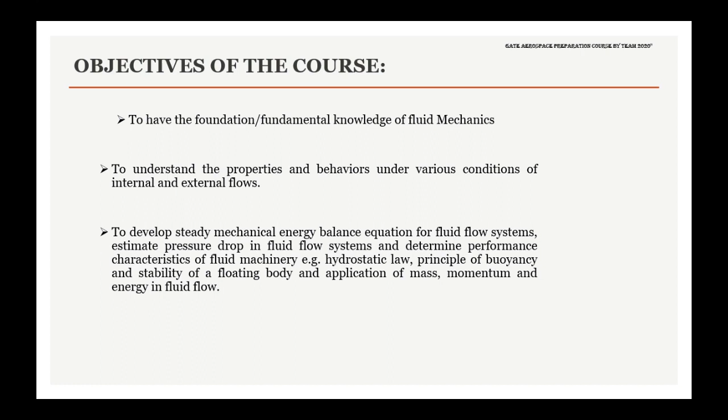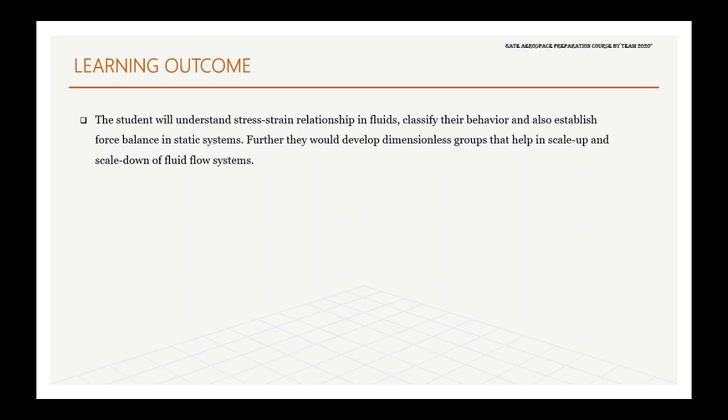There are more objectives that you can derive from this course. Let's look at the learning outcome. What is going to be the learning outcome after you have studied this course? Number one, the student will be able to understand the stress-strain relationship in fluids and classify their behavior.

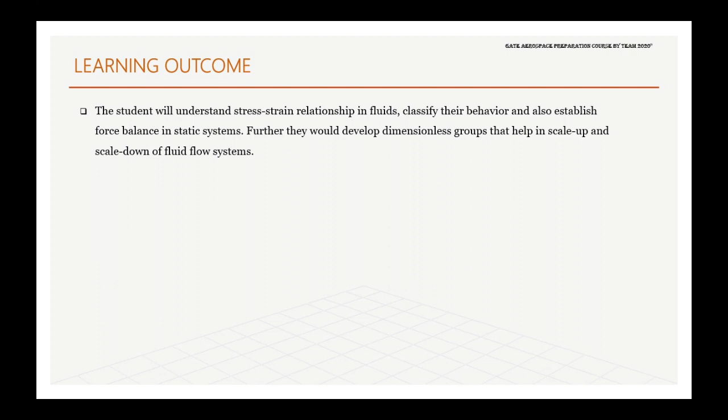They will also establish force balance in static systems. Further, they would develop dimensionless groups that help in scale-up and scale-down of fluid flow systems. That is learning outcome number one.

Learning outcome number two is that students will be able to apply Bernoulli's principle and compute pressure drop in flow systems of different configurations. You will be able to compute and understand the application of Bernoulli's principle.

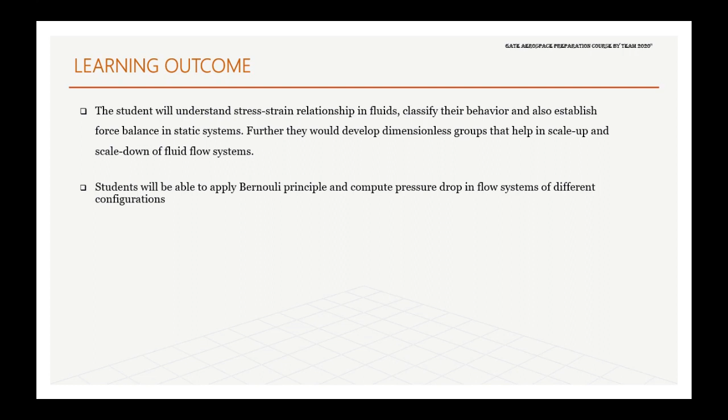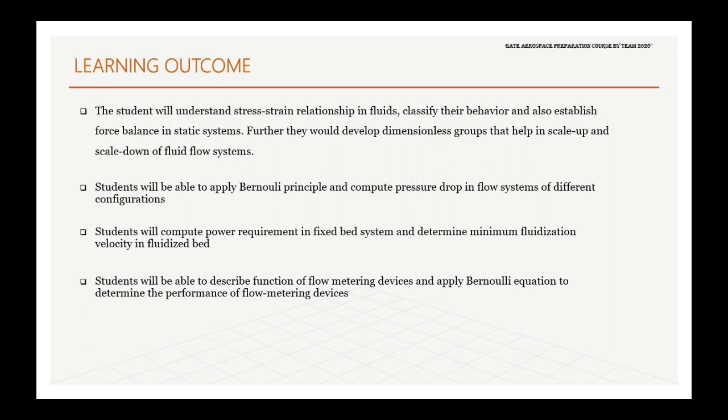Number three, students will compute power requirements in fixed bed systems and determine minimum fluidization velocity in a fluidized bed. Students should also be able to describe the function of flow metering devices and apply Bernoulli's equation to determine the performance of flow metering devices.

Last but not least, students should be able to determine and analyze the performance aspects of fluid machinery, specifically for centrifugal pumps and reciprocating pumps. Those are the learning outcomes, among others, which you can derive from this course.

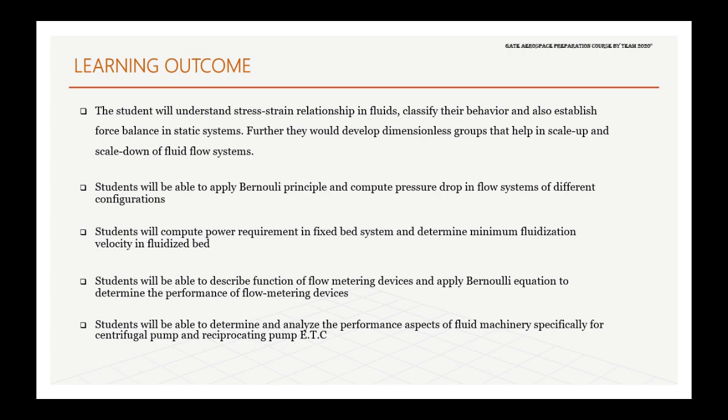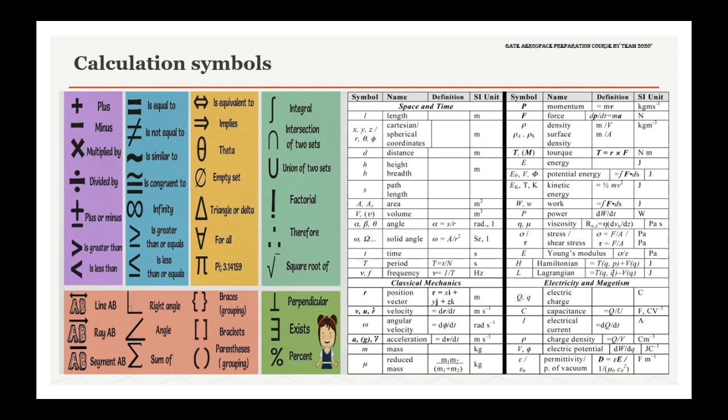Thank you very much. Now we want to look into definitions. Let us look at the definitions of fluid. That is where we want to start from. The topic says basic fluid mechanics. What are the basics, the foundations? That is the fundamentals. That is what we want to look into - the fundamental fluid mechanics. How does it revolve? That is what we want to look into.

Definition number one: a fluid is a substance that deforms continuously in the face of tangential or shear stress, irrespective of the magnitude of shear stress. This continuous deformation under the application of shear stress constitutes a flow.

The deformation - a fluid is a substance that deforms continuously. It is a substance, and it can deform continuously. That means it has a liquidation aspect to it. It can change its form. It can deform in the face of tangential or shear stress that has been applied to it. That is what a fluid is.

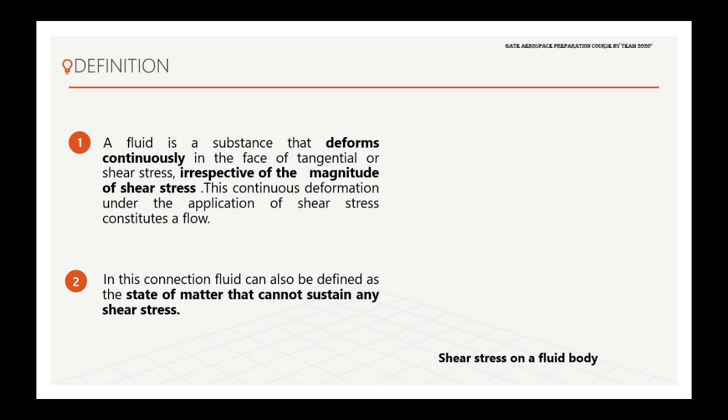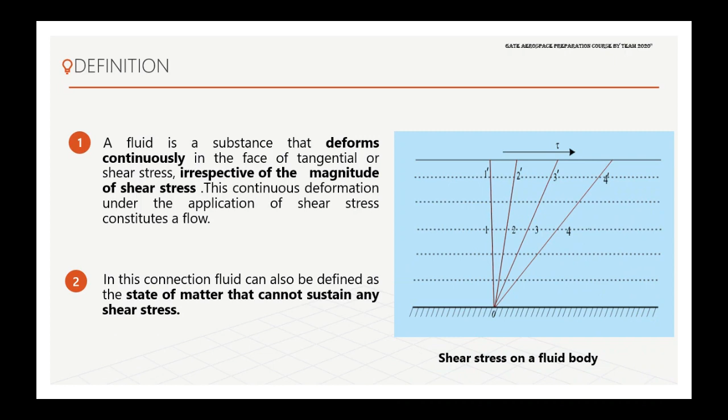If a shear stress is applied at any location in a fluid, the element 011, which is on the image I showed to you, initially at rest, will move to 022, then to 033, further it moves to 044, and continues to move in a similar fashion. That is, when stress is applied to a fluid, it moves within time - within seconds, within minutes. It moves, and then you see that the shear stress has been applied to the fluid, and it deformed.

In other words, the tangential stress in a fluid body depends on the velocity of deformation and vanishes as this velocity approaches zero. A good example is Newton's parallel plate experiment, where dependence of shear force on the velocity of deformation was established. So the tangential stress in a fluid body depends on the velocity of deformation, and as velocity approaches zero, there will be a vanishing within the fluid. We are going to see this in more explanation as we go further.

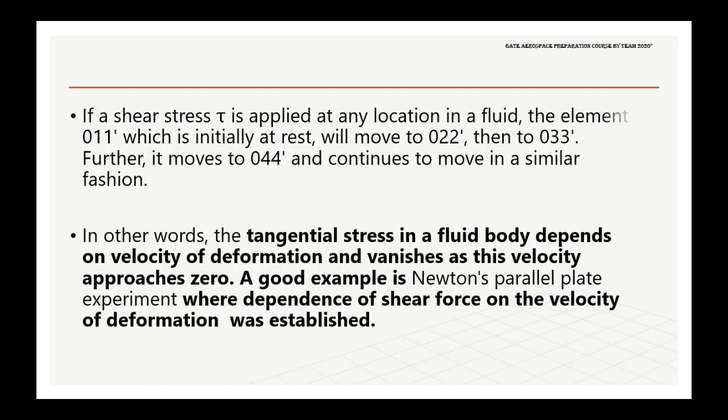Now let us look at the distinction between solid and fluid, because someone might say, is fluid and solid not the same? No, they are not the same. Solid is different from fluid. What is in solid that you can't find in fluid, or what are the distinctions between the two that we have just mentioned?

In solid, there is a more compact structure - when something is solid, you will find more compact structure. But in fluid, there is a less compact structure; fluid takes the shape of the container you drop it in. The attractive forces between the molecules inside solid are larger, therefore more closely packed. But in fluid, attractive forces between the molecules are smaller, therefore more loosely packed. That is why fluid and solid are not the same.

Number three: solids can resist tangential stresses in static conditions, but fluid cannot resist tangential stresses in static conditions. No, fluid cannot withstand that.

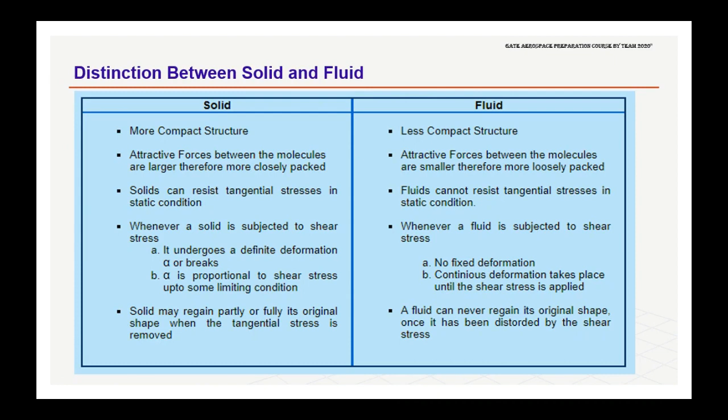So the distinctions between solid and fluid are many that we can mention, but these are just a few that we can bring up in this theory class. Now let's move further. We want to look at basic fluid mechanics and potential flow theory.

Basic fluid mechanics conservation laws are: mass, momentum, integral and differential form. Then the next topic is potential flow theory. Potential flow theory is different from basic fluid mechanics, but they go hand in hand. In potential flow theory, we will be having sources, sinks, doublets, line vortex, and their superposition, like viscosity, Reynolds number, and so on.

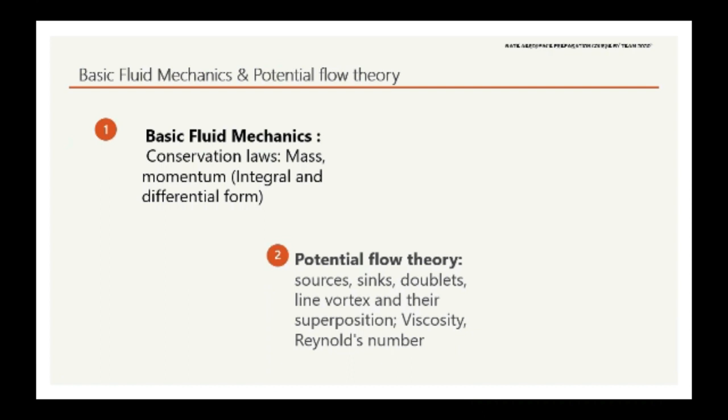Now let us look at basic fluid mechanics, conservation law, also called law of conservation. In physics, several principles state that certain physical properties, that is measurable quantities, do not change in the course of time within an isolated physical system.

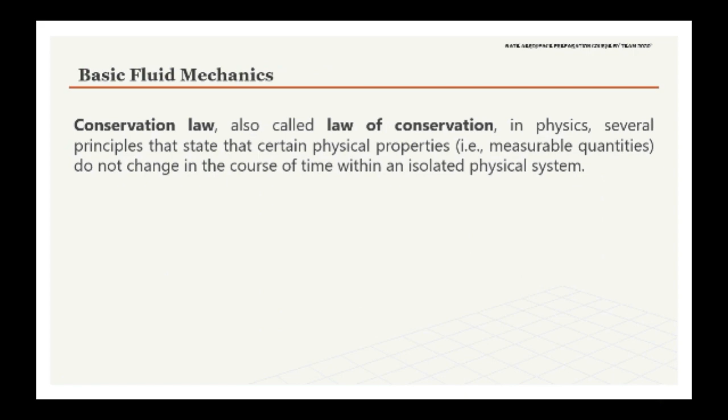What does it mean? In classical physics, laws of this type govern energy, momentum, angular momentum, mass, and electric charge. In particle physics, other conservation laws apply to properties of subatomic particles that are invariant during interactions. An important function of conservation laws is that they make it possible to predict the macroscopic behavior of a system without having to consider the microscopic details of the cause of a physical process or chemical reaction.

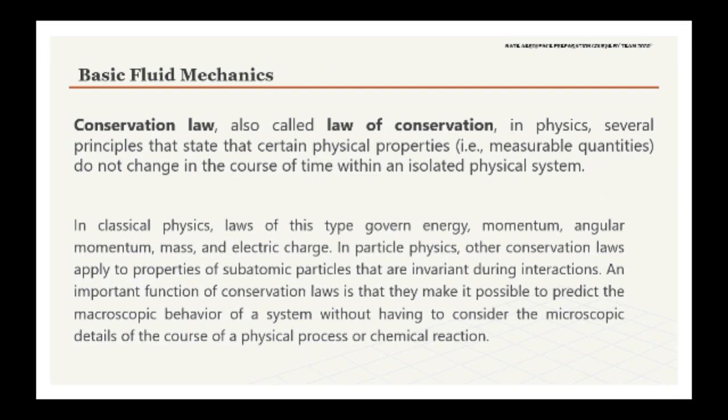In this basic fluid mechanics, we are going to see some little things that happen within some bodies that we might not take note of until we are in a class like this, before we begin to notice how the process begins. So let us look at conservation of mass.

Conservation of mass implies that matter can neither be created nor destroyed. That is, processes that change the physical or chemical properties of a substance within an isolated system, such as conversion of liquid to gas, mean changing or converting from liquid to a different state.

Example: you can put water in a plastic container and put it in a freezer. You are making a conversion of the fluid body, but it will come out in the form of solid. The system leaves the total mass unchanged. Strictly speaking, mass is not a conserved quantity; however, except in nuclear reactions, the conversion of rest mass into other forms of mass-energy is so small that, to a high degree of precision, rest mass may be thought of as conserved.

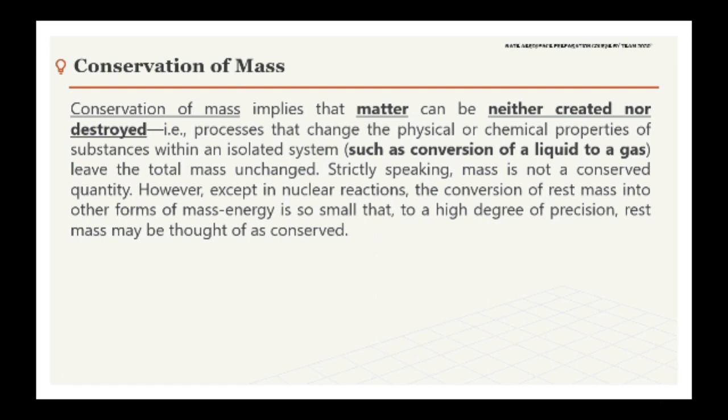But liquid is not rigid, liquid has no fixed shape, but it has a fixed volume. When it comes to gas, gas is not rigid, gas has no fixed shape, and gas has no fixed volume, because it can disappear into thin air.

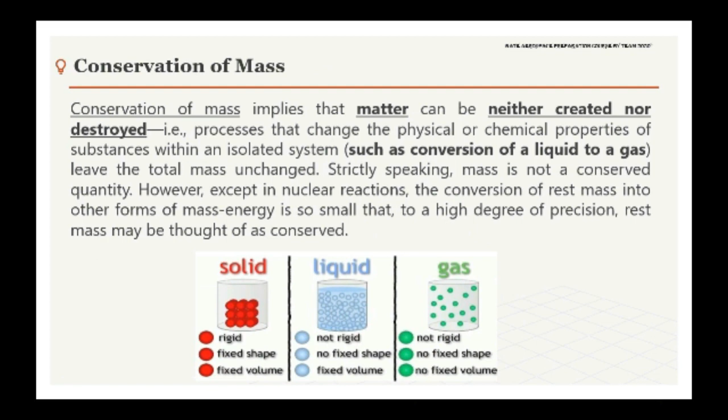Gas is not rigid, it has no fixed shape, and it has no fixed volume. But liquid has a fixed volume, though no fixed shape. Solid has fixed shape and also fixed volume. Let's go to the next slide.

Now, conservation of momentum. We have looked at conservation of mass; now we want to look at conservation of momentum. This is a general law of physics, according to which the quantity called momentum that characterizes motion never changes in an isolated collection of objects. That is, the total momentum of a system remains constant.

Momentum is equal to the mass of an object multiplied by its velocity, and is equivalent to the force required to bring the object to a stop in a unit length of time. For any array of several objects, the total momentum is the sum of the individual momenta. There is a peculiarity, however, in that momentum is a vector involving both direction and magnitude of motion, so that momenta of objects going in opposite directions can cancel to yield an overall sum of zero.

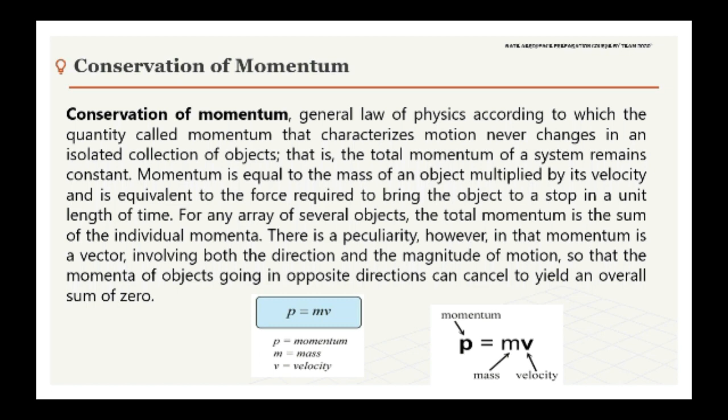So let's go into conservation law, integral and differential form. In most engineering applications, the physical system is governed by a set of conservation laws. For example, the governing equations in gas dynamics correspond to the conservation of mass, momentum, and energy. These conservation laws are often written in integral form for a fixed physical domain.

Where U is the conserved state, F is the flux of the conserved state, N is the outward pointing unit normal on the boundary of the domain, and S is a source term.

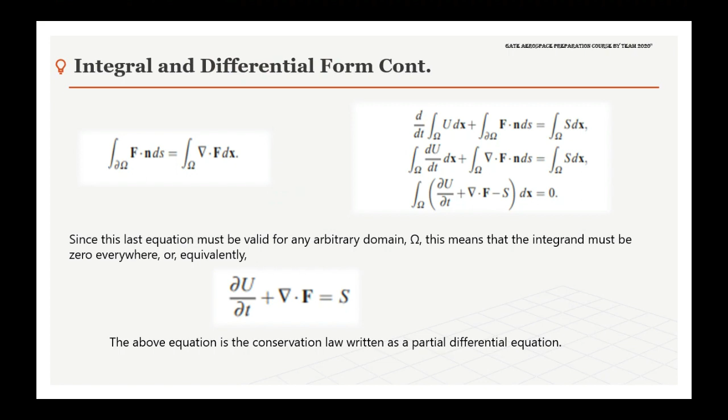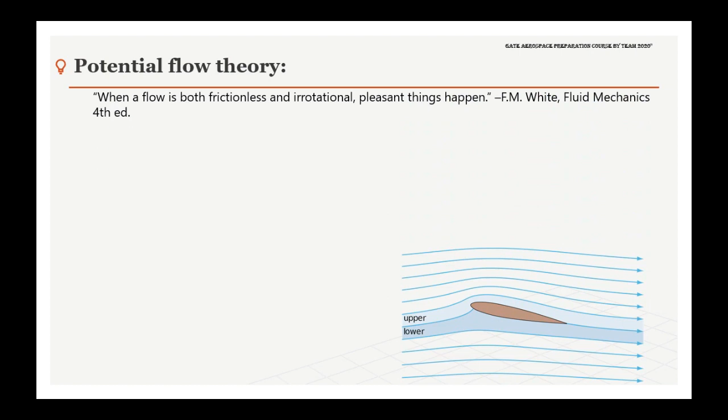Now let us look at potential flow. When a flow is both frictionless and irrotational, pleasant things happen. This quote was made by F.M. White, who was a first-grade fluid mechanics educator.

We can treat external flows around bodies as inviscid, that is frictionless, and irrotational, meaning the fluid particles are not rotating. So when you hear the word frictionless, it means inviscid, and irrotational means the fluid particles are not rotating. This is because viscous effects are limited to a thin layer next to the body.

Next to the body, this thin layer is called the boundary layer. Let me give an example to explain this.

When you put your two hands together and rub them, remember your palm has a layer, and the layers of the two hands come together, which is called the boundary of the two hands. When you rub them together, that is when friction or shear stress is applied, and you sense that while rubbing them in a straight motion. Both hands have what we call boundaries, the layers of your palm. That is what is meant by the boundary layer.

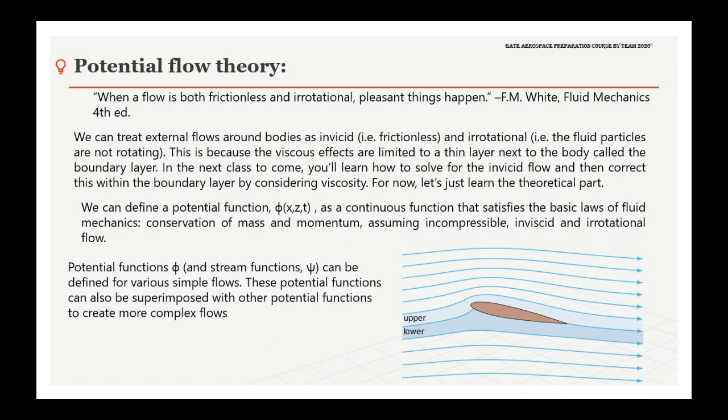So, potential functions and stream functions. Now you see the sign for potential functions and the sign for stream functions. These can be defined for various simple flows. These potential functions can also be superimposed with other potential functions to create more complex flows, which we are going to see.

Now, potential or irrotational flow theory. What are potential flow theory? Or what are irrotational flows? You can call it irrotational or potential flow. It's a cornerstone of fluid dynamics for two reasons.

Historically, its importance grew from the development made possible by the theory of harmonic functions, and the many fluid problems thus made accessible within the theory. But a second, more important point is that potential flow is actually realized in nature, or at least approximated in many situations of practical importance.

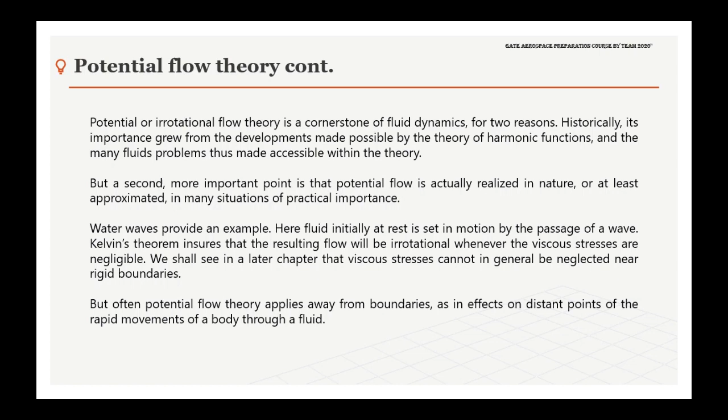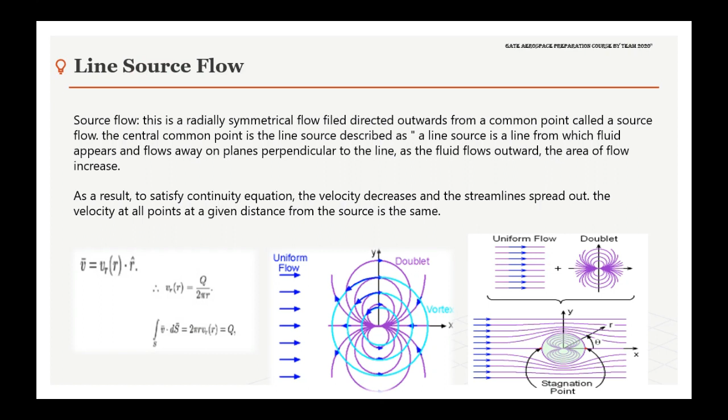Now you can see the equations for uniform flow, the doublet, the vortex, and the stagnation point. But we are not going into the equations and calculations yet, because we are still dealing with the theory of flow. We need to understand the definitions and how it comes about before we go into deriving equations.

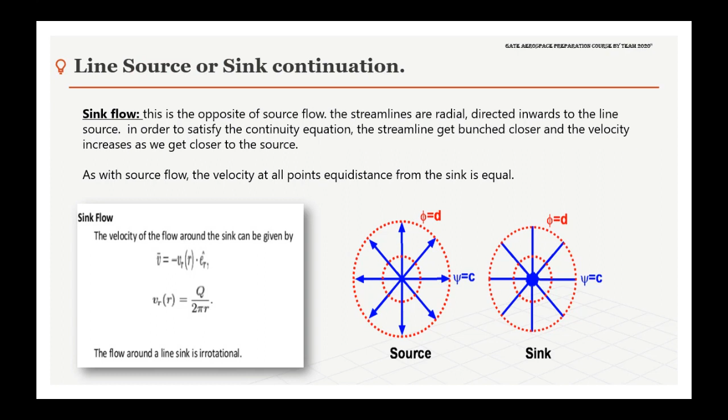Then we have the doublet. A doublet can be thought of as a combination of a source and a sink of equal strength, kept at an infinitesimally small distance apart from each other. That is what a doublet is. Thus, the streamlines can be seen to start and end at the same point, as they spread out.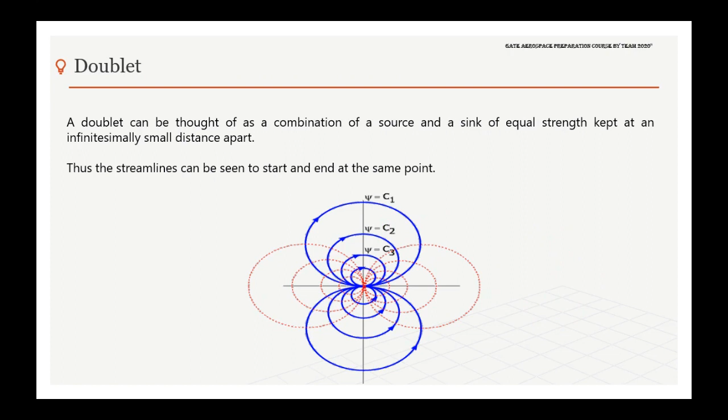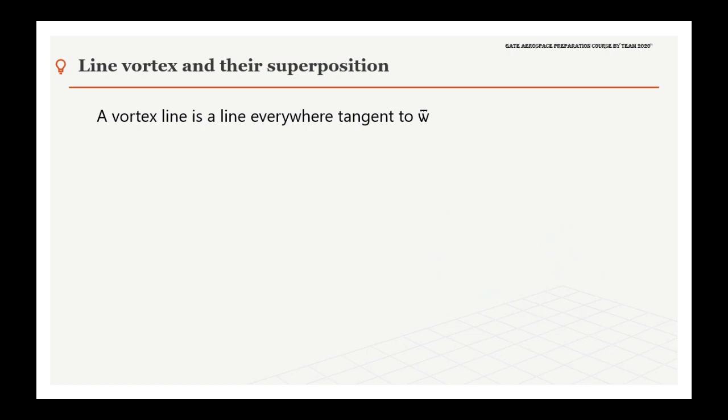So that is the doublet. Now let us look at line vortex and their superpositions. In the next classes or sections, we are going to see calculations for everything we have discussed so far. Now, line vortex and their superposition. A vortex line is a line everywhere tangent to...

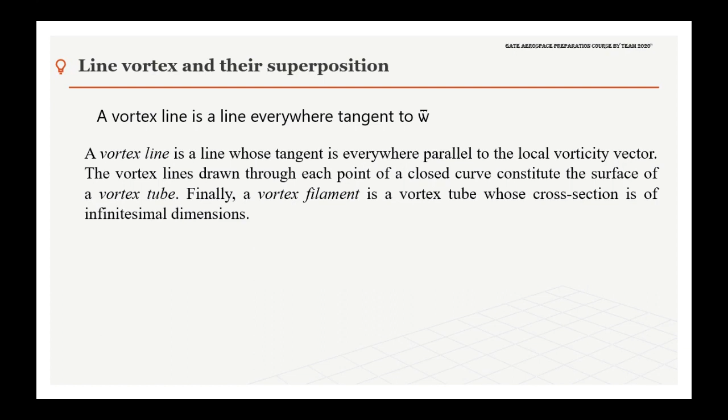We always, everybody knows the physics when you are in the aviation industry or the industry that we are into flying, you definitely know. I might not want to go down to describing the wings of an aircraft to you and the controls on it, but then with vortex, which we want to discuss, and with many things based on aerodynamics that we're going to discuss, it's going to be very minimal but basic.

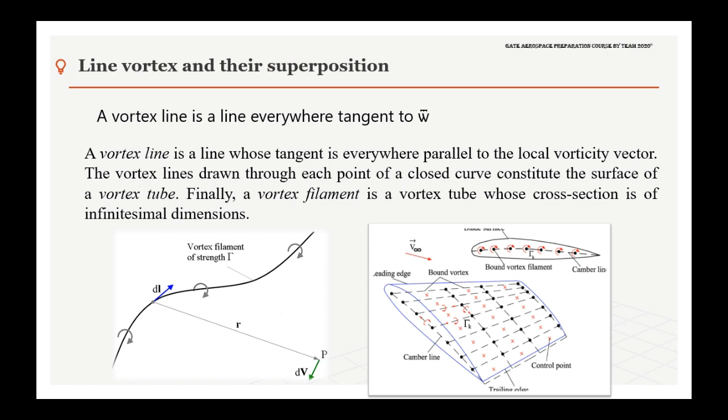But that is not what we are going to. We are dealing with our vortex, line of vortex, and then you can see the picture of a camber. You see the filament and the bound vortex. Now this is the camber line, and this is a camber line here that you can see with the line of vortex.

Now we will go into the next. Now let us look at viscosity. Now we would see viscosity and the shear stress that has been applied, how it comes about. Now the viscosity of a fluid is the measure of its resistance to deformation at a given rate.

The significance of the parameter appearing in the previous expression for the stress tensor can be seen from the form taken by the relation in the special case of simple shearing motion, with the only non-zero velocity derivative. All of the components are zero apart from the shear stresses.

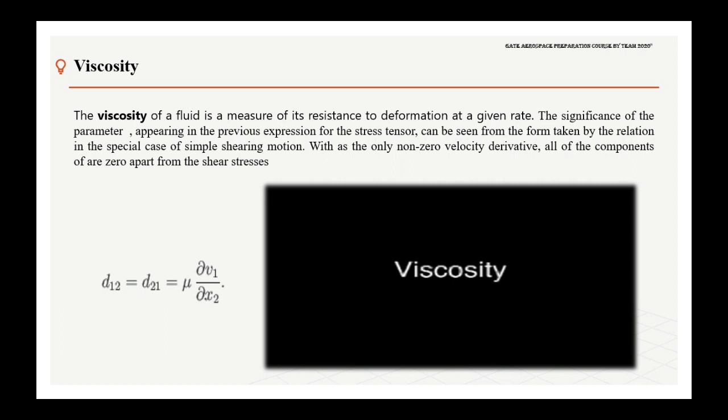Now we are going to see on this video viscosity, and then you see a shear stress on it. I'm going to play this video. You might not hear the audio part of the video, but the picture part of it is what I really want you to take into practice. So I'm going to play this video before I continue in the next class. So let us look at the video.

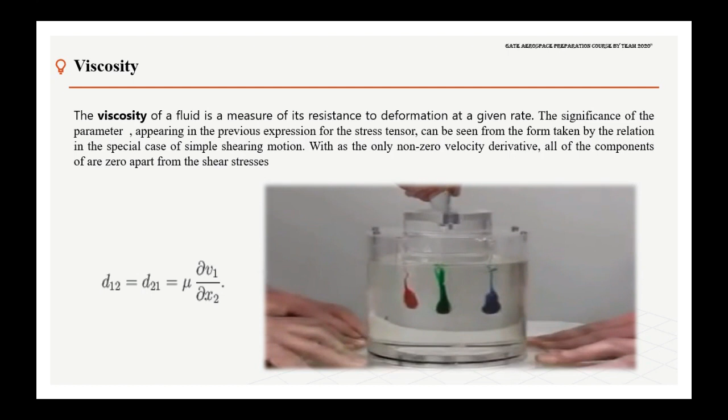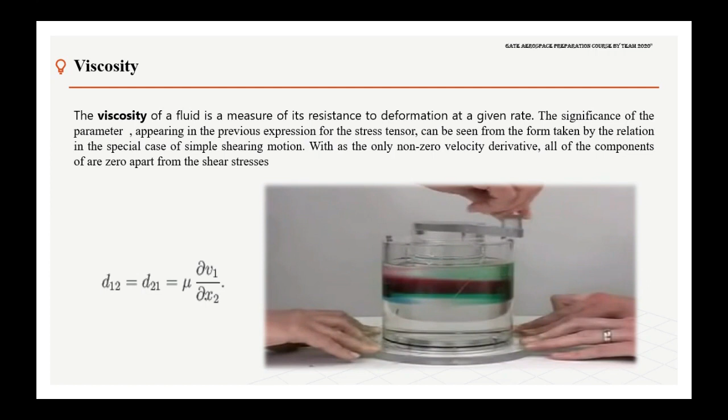Viscosity. That is a red fluid. And this is a green color. And then we want to put blue corn syrup. So let's see what shear stress does, and let's see how it's going to be. Now it's going to be rotated slowly, five times: that is 2, and that is 3, this 3, 4, and this is 5.

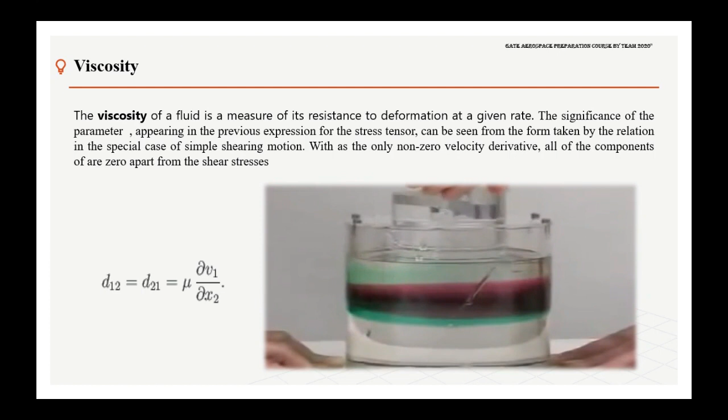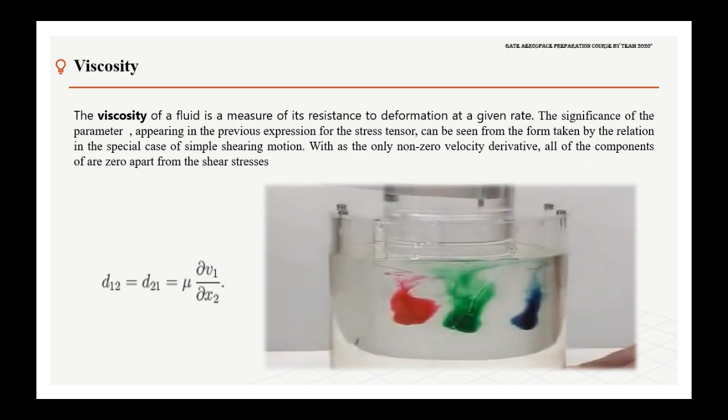So we are going to return back on the experiment we want to see. That is 1, that is 2, and that is 3, and this is 4. And then we return back to this. Now you see this is viscosity that has just taken place. Now let's go to the next slide and then discuss.

Thus, viscosity is this constant of the proportionality between the rate of shear and the tangential force per unit area when parallel plane layers of fluid slide over one another. Did you see that on that video? This constant of proportionality is generally referred to as viscosity.

It is a matter of experience that the force acting between layers of fluid undergoing relative sliding motion always tends to oppose the motion, which implies that μ is greater than 0. But now we are not going to go into this viscosity equation now, we are going to be doing that in the next sections.

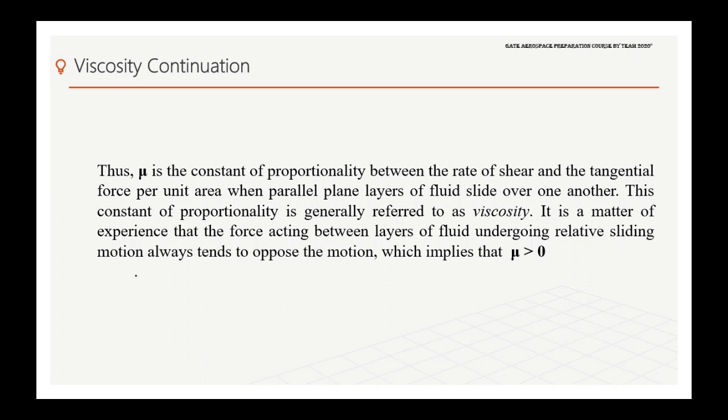Now let us look at Reynolds numbers. We want to look at Reynolds number. Now the Reynolds number helps predict flow patterns in different fluid flow situations.

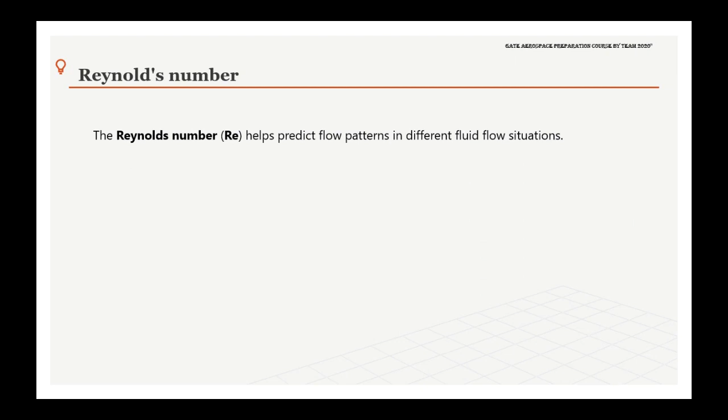Reynolds number helps us to predict flow patterns in different fluid flow situations. The Reynolds number is the ratio of inertial forces to viscous forces within a fluid which is subjected to relative internal movement due to different fluid velocities.

A region where these forces can change behavior is known as a boundary layer. We just saw a video of viscosity, where the layers of fluid, as it was being turned, started getting sheared apart because of shear stress. But as it was returned back, every layer started to return back to its position, such as the bounding surface in the interior of a pipe.

A similar effect is created by the introduction of a stream of high velocity fluid into a lower velocity fluid, such as the hot gases emitted from a flame in air. This relative movement generates fluid friction, which is a factor in developing turbulent flow.

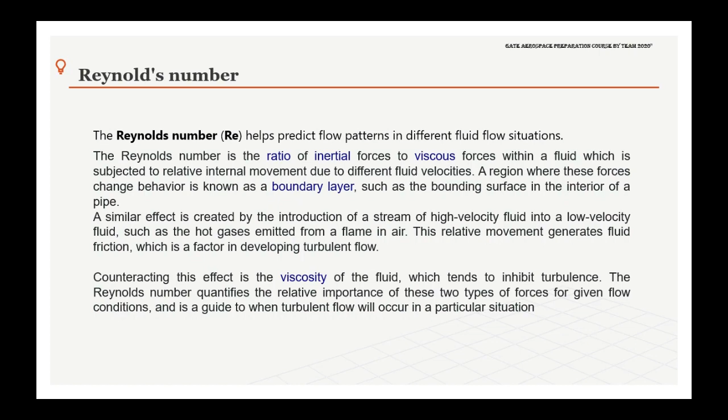This ability to predict the onset of turbulent flow is an important design tool for equipment such as piping systems or aircraft wings. The Reynolds number is also used in scaling of fluid dynamics problems and is used to determine dynamic similitude between two different cases of fluid flow, such as between a model aircraft and its full-size version. Such scaling is not linear, and the application of Reynolds number to both situations allows scaling factors to be developed.

With respect to laminar and turbulent flow regimes: laminar flow occurs at low Reynolds numbers, where viscous forces are dominant, and is characterized by smooth, constant fluid motion. Turbulent flow occurs at high Reynolds numbers and is dominated by inertial forces, which tend to produce chaotic eddies, vortices, and other flow instabilities. That is what turbulent flow does.

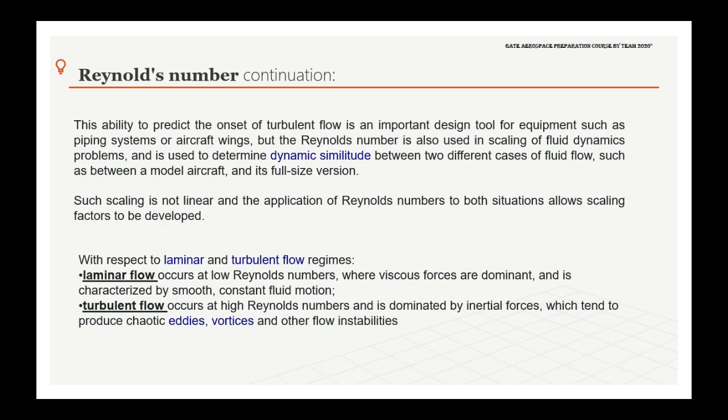Laminar flows occur at low Reynolds numbers, where viscous forces are dominant, and is characterized as smooth, constant flow motion. Now, when an aircraft is flying and is not having a smooth flow, that means the fluid in the air is not in a dense situation.

Now let's see the Reynolds number. Reynolds number is defined as you can see on the equations. ρ is the density of the fluid, SI unit. U is the flow speed, as you can see on the equations. L is a characteristic linear dimension. μ is the dynamic viscosity of the fluid. ν is the kinematic viscosity of the fluid.

To give a definition that generally includes the fluid properties of density and viscosity, fluid velocity, and a characteristic length or characteristic dimension. Now let's come back so that you understand this: Re, which is Reynolds number, equals density of fluid times velocity of fluid times diameter of pipe, over the viscosity of fluid. This gives a definition that generally includes the fluid properties of density and viscosity, plus a velocity and a characteristic length or characteristic dimension, which is L in the above equation.

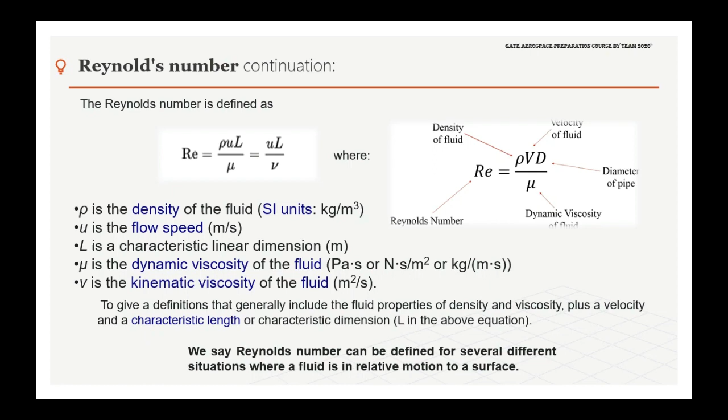We want to see airfoil and wings. An airfoil, in American English it is called airfoil, but in British English it is called aerofoil, is the cross-section shape of a wing, blade, propeller, rotor, turbine, or sail of an aircraft. So an airfoil is the cross-sectional shape of a wing on an airplane.

So an airfoil-shaped body moving through a fluid produces an aerodynamic force. The component of this force perpendicular to the direction of motion is called lift. The component parallel to the direction of motion is called drag. When you hear about the four forces of aerodynamics, that is lift, drag, weight, which is gravity, and thrust.

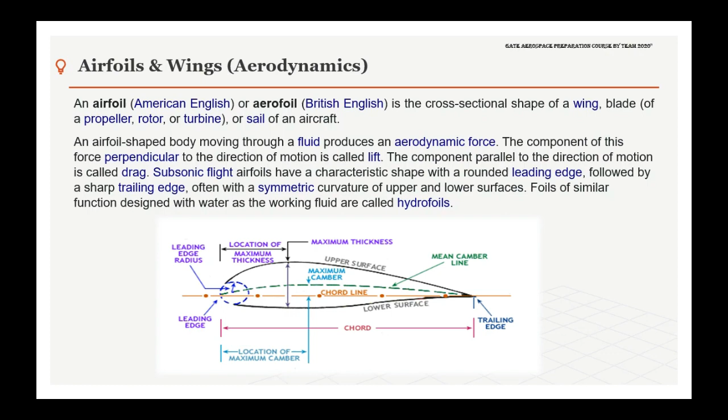So let's see, this is a cross section. You have here the shape of an aerofoil. You have the leading edge and the radius. You have the location of the maximum thickness, then the maximum thickness which you can see the length, and then the chord line in red. Then you have the maximum camber, the mean camber at the rear, and the trailing edge. That is the length of the chord, and you can see the locations of the maximum camber. This is a cross-sectional shape of a wing, which is called camber and airfoil.

Now, the lift on an airfoil is primarily the result of its angle of attack. When oriented at a suitable angle, the airfoil deflects the oncoming air by making use of flaps. Deflecting the oncoming air for fixed wing aircraft, a downward force is generated, resulting in a force on the airfoil in the direction opposite to the deflection.

This force is known as aerodynamic force, and can be resolved into two components: one, lift; two, drag.

Most foil shapes require a positive angle of attack to generate lift, but a cambered airfoil can generate lift at zero angle of attack, that is when flying an aircraft. So when taking off, there are different mechanics that need to be applied, in the case of non-cambered airfoil.

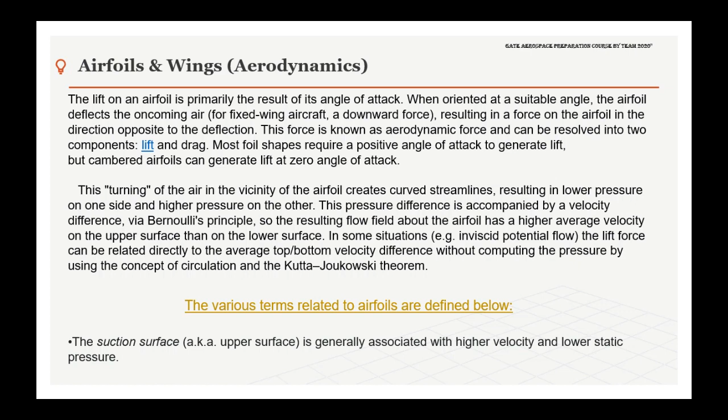The suction surface, aka the upper surface, is generally associated with higher velocity and lower static pressure. Then we have the pressure surface, aka lower surface, which has a comparatively higher static pressure than the suction surface. The pressure gradient between these two surfaces contributes to the lift force generated for a given airfoil.

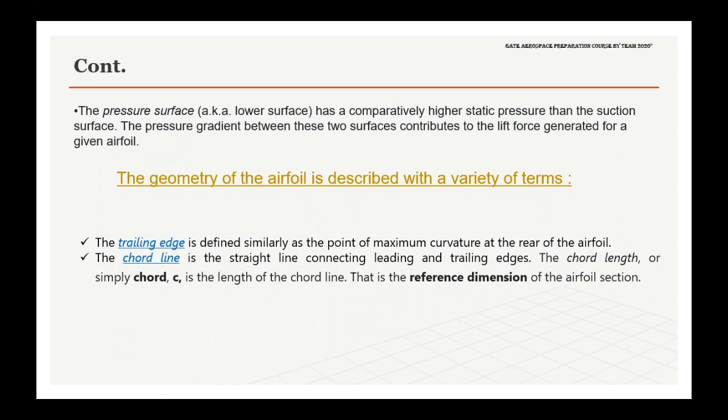Now the geometry of the airfoil is described with a variety of terms. So that is what we want to do, what we want to look into.

Now, one, the leading edge. The leading edge is the point at the front of the airfoil that has maximum curvature, which is minimum radius. Then we have the trailing edge. The trailing edge is defined similarly as the point of maximum curvature at the rear of the airfoil.

The chord line, which you see as the dot from the leading edge to the trailing edge, is the straight line connecting the leading and trailing edge. The chord length, or simply chord, using symbol C, is used as a symbol for chord. It is the length of the chord line, that is the reference dimension of the airfoil sections.

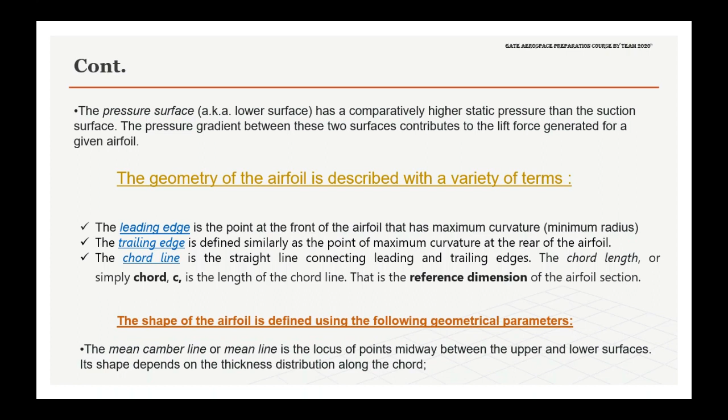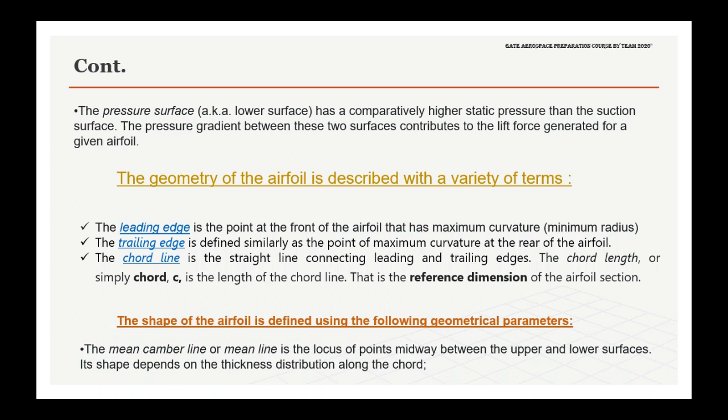So let us see, the shape of the airfoil is defined using the following geometry parameters. The mean camber line, or the mean line, is the locus of points midway between the upper and the lower surfaces. Its shape depends on the thickness distributed along the chord. So that is the geometry parameters about the airfoil. Then the thickness of an airfoil varies along the chord.

Thickness may be measured in either of two ways. One, the thickness measured perpendicular to the camber line - this is sometimes described as the American convention. Two, thickness measured perpendicular to the chord line - this is sometimes described as the British convention.

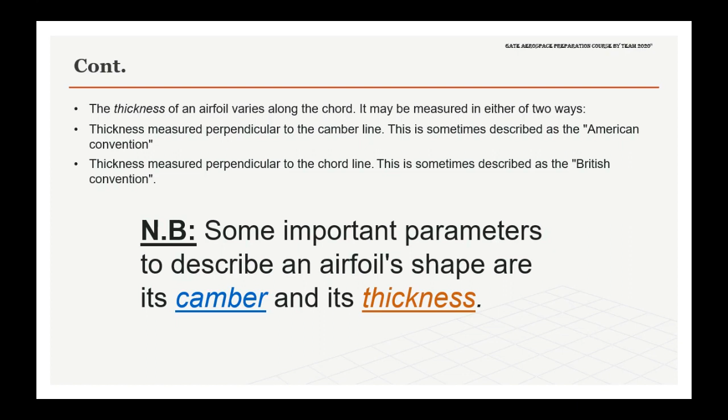Note some important parameters to describe an airfoil shape are its camber and its thickness. Those are the parameters used in describing an airfoil shape.

Okay, so now let's look at the wing. A wing is a type of fin that produces lift while moving through air or some other fluid. As such, wings have streamlined cross sections that are subject to aerodynamic forces and act as airfoil.

So, wings have streamlined cross sections that are subjected to aerodynamic forces and act as airfoil.

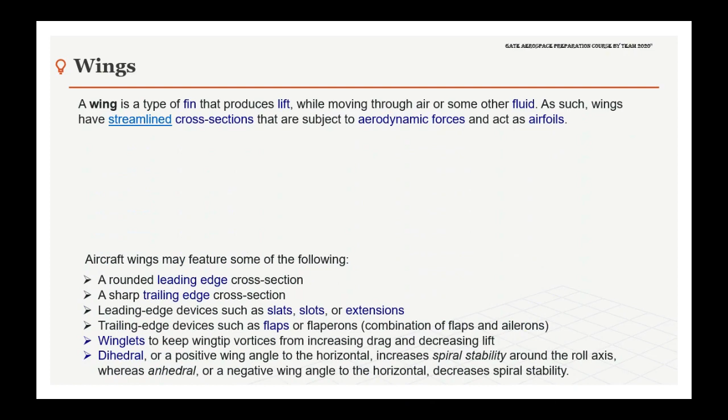A wing's aerodynamic efficiency is expressed as its lift to drag ratio. Remember, in the former slide, we talked about the two forces that are paramount, which is lift and drag. The lift a wing generates at a given speed and angle of attack can be 1 to 2 orders of magnitude greater than the total drag on the wing. So a high lift to drag ratio requires significantly smaller thrust.

Thrust is the forward movement - thrust to propel the wings through the air at sufficient lift. So thrust does what? Thrust moves the aircraft forward.

So then let's also see the design features. What are the design features that we need to note? Aircraft wings may feature some of the following: one, a rounded leading edge cross section - that is one of the features of design that you might see. Number two, a sharp trailing edge cross section that you are going to see on the aircraft wings.

Then you are going to also see leading edge devices such as slats, slots, or extensions. Now you find that in passenger aircraft, at the wing you would find these controls: the slat, the spoilers, the flaps, the ailerons. Trailing edge devices such as flaps, or combinations of flaps and ailerons together - that is why you see that word called flaperons.

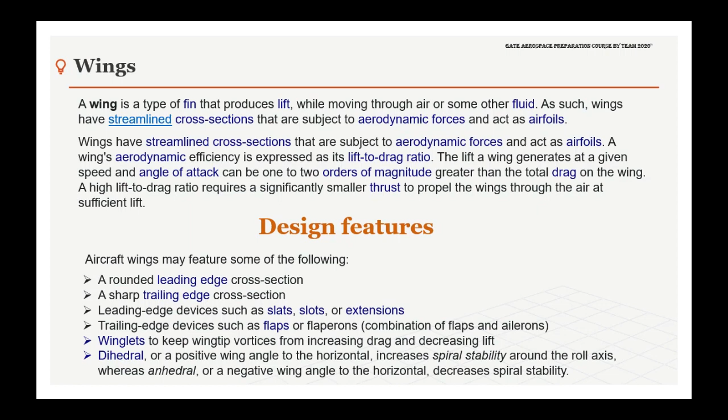Aircraft wings may have various devices such as flaps, slats, spoilers, ailerons, that the pilot uses to modify the shape and surface area of the wing to change its operating characteristics in flight.

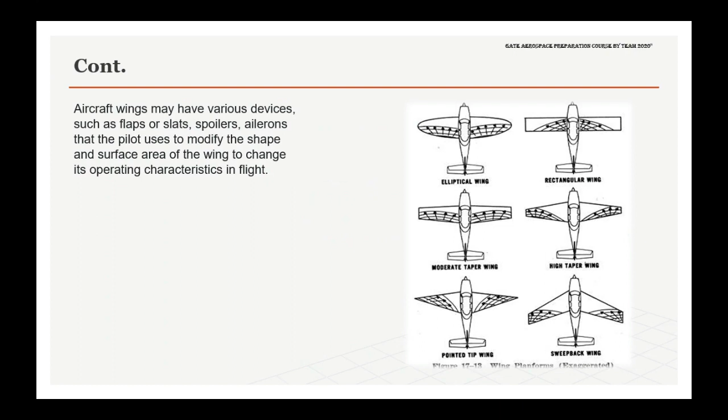Now, besides fixed wing aircraft, applications for wing shapes include: one, hang gliders, which use wings ranging from fully flexible, like paragliders and gliding parachutes, to flexible framed sail wings, to rigid. Then we have the kite, which uses a variety of lifting surfaces.

Then we have flying model airplanes. Then we also have the helicopter, which uses a rotating wing with variable pitch angles to provide directional forces. Then also propellers, whose blades generate lift for propulsion. Then the NASA Space Shuttle, which uses its wings only to glide during its descent to a runway. This type of aircraft is called a space plane, etc.

Now, on the right hand side of these presentations, you will see types of wings and their names: elliptical wings, rectangular wings, moderate taper wings, high taper wings, pointed tip wings, and sweep back wings. Many times passenger aircraft use sweep back wings.